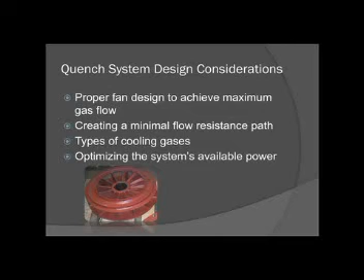Another consideration is the type of cooling gases that you need to use in the system. Whether you're going to be using a single gas system or a multiple gas system needs to be considered. And the objective is to optimize the system's available power throughout the entire range of the furnace. What I'm going to do here is basically compare our typical, or conventional, quench design method to our synchronous design, which we used on our new furnace.

So a conventional quench system is typically designed to operate at one pressure, and that's usually the maximum pressure rating of the furnace. When you do this, you sometimes can sacrifice performance because it's only designed to operate for one particular gas at a particular pressure. And when you go lower in pressure, say at -5 or +5 psig quench pressures, you're not utilizing your full capacity of the system. In turn, that can mean longer cycle times and limitations whenever you use multiple gases in the furnace.

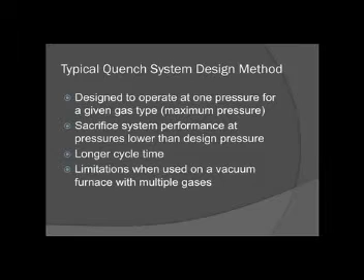When you do use multiple gases in a furnace, you typically design for your best quenching gas, and in this example, I'm going to use nitrogen. So you try to get maximum performance at the maximum pressure rating of the furnace using your best cooling gas. And then when you have a multiple gas system, you typically would sacrifice performance because you're not able to maintain that same pressure because of the density of the gas, or you could slow the fan speed down. And obviously when you do either of those, you're not utilizing the full potential of the system. That in turn can equal longer cycle time. It can even lead to not being able to process certain materials in your furnace.

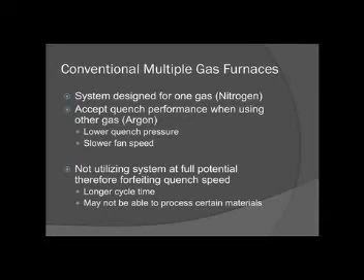Our synchronous design concept is a little different in comparison to our conventional design, and that is the conventional design usually would be operating at either full speed or below full speed conditions, and that's what's called the constant torque range. And when you're operating lower than the maximum rated speed of the motor, you're not utilizing all the available power in the system.

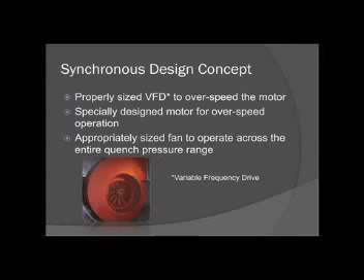In our new design, instead of using, say, a 3600 RPM motor, we went down to an 1800 RPM motor and had it specially designed so you could overspeed the motor, so it had to be specially balanced and rated for overspeed conditions. So we used an 1800 RPM motor that could be oversped to 3600 RPM. In addition, we had to incorporate a VFD to allow us to overspeed the motor, and that also allowed us to appropriately design a fan which would be a little bit larger than a typical design, because we want to be able to operate over the entire pressure range of the furnace.

And what I did is I sort of tried to normalize things to show you the effects on the cooling rate. Cooling rate obviously is a product of pressure and speed, or gas velocity.

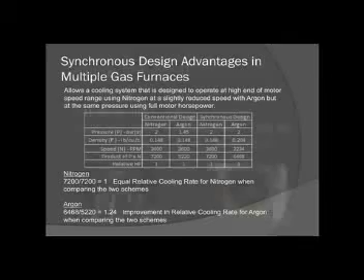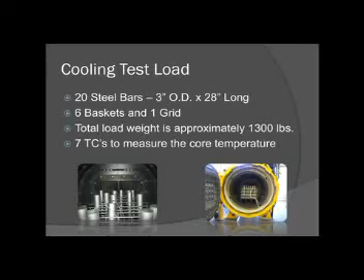What we did here to test the conventional design and our new 20-bar design was to use a standard load. The load consisted of 20 steel bars, 3 inches in diameter, 28 inches long. We had 6 baskets, 1 grid, and an approximate weight of 1,300 pounds. We measured the thermocouples in various bars, averaged the cooling temperatures of the work thermocouples, and came up with average curves to better describe what's going on in our tests.

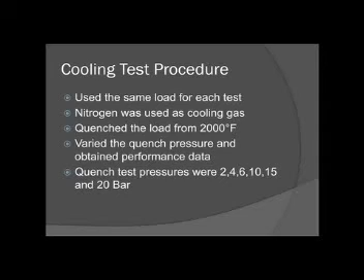Our test procedure: we used the same load to minimize any variables. We used nitrogen cooling gas, brought the load up to 2,000 degrees, quenched from there, and varied the pressure, obtaining data at 2, 4, 6, 10, 15, and 20 bar. We also compared one of Solar Atmospheres' best quenching furnaces, the same 5748 size furnace, and compared the two at 10 bar as well.

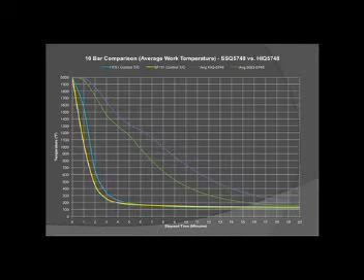As you can see here, the 2 lines on the left are the control thermocouples, which aren't really important in this scenario. But what I'd like to stress is the cooling rate of the load in the best quenching 10 bar conventional design furnace here on the right compared to our 20 bar design at 10 bar. As you can see, from 2,000 down to 1,000 degrees, we improved the cooling rate by over 2 minutes, which, as we all know, is great.

The next test we did was to vary the pressure in our 20 bar design to test the different cooling effects based on pressure. We did 2 through 20 bar, and as you can see, the cooling rate improved greatly. The curve on the right is 2 bar, and as you go across, 4, 6, 10, 15, and 20 bar.

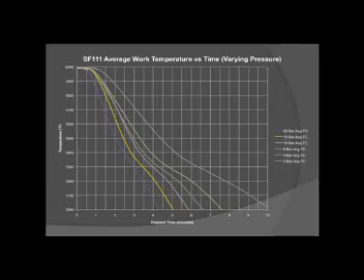One thing I'd like to stress real quick: with the previous design, in a 10 bar furnace, from 2,000 down to 1,000 degrees, we were able to cool the load in approximately 8 minutes. When we compare that to our new design, we were able to achieve the same cooling rate, actually a little bit better, using just 4 bar. It's an extra added benefit because you don't have to use as much gas to get the same cooling rate.

In conclusion, what I'd like to stress is that incorporating a VFD into the quench system allows versatility, not only in operating over a different pressure range, but it also allows you to utilize the full potential of your available system even when using multiple gases.

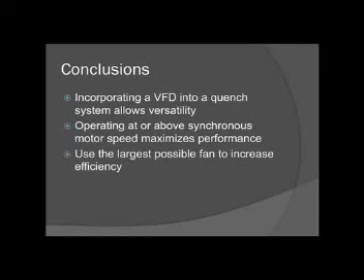I'd also like to stress that operating at synchronous speed or above is ideal because you're utilizing the full horsepower rating of the motor, and therefore you're able to get better quenching speeds. That also allows you to use the largest possible fan to increase the efficiency of the system.